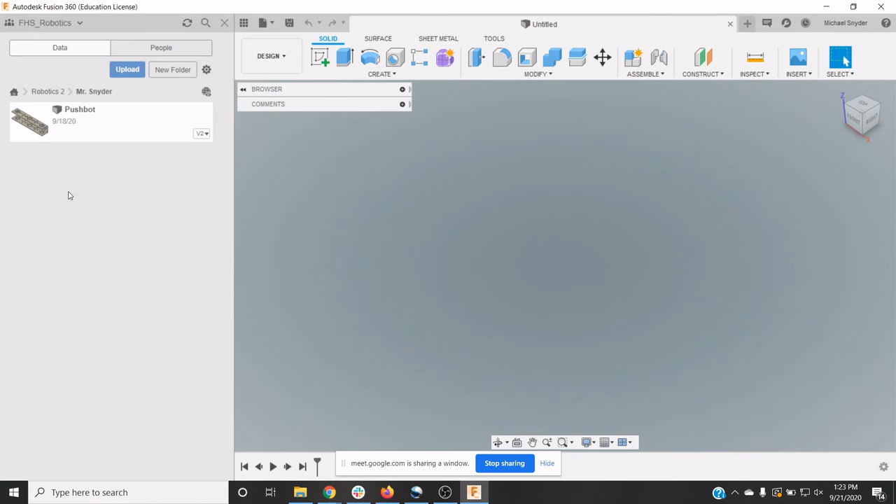We're going to open up the Pushbot project that we created inside the Robotics 2 folder. That's how we want to keep things organized.

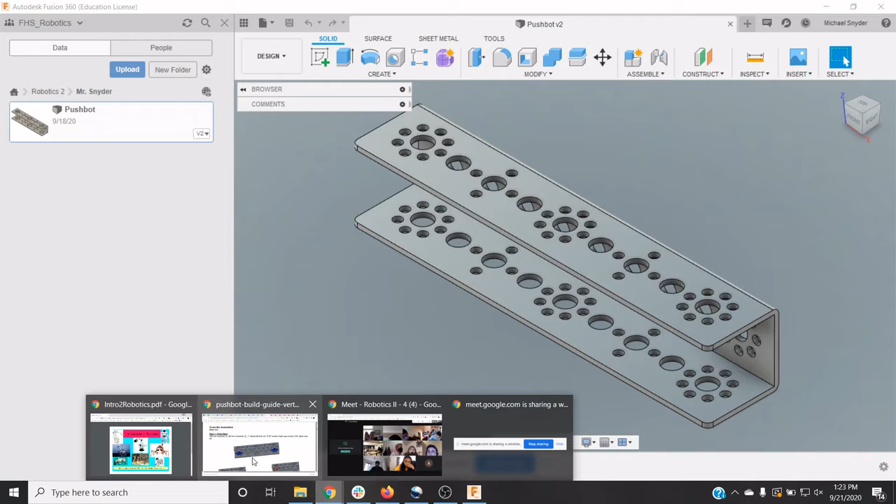So far, I have brought in a part from the Tetrix parts folder. Now that I've got my project open, I can go ahead and open up the Tetrix parts folder.

I want to look for different channels. Channel starts with a C up toward the top there. There are my channels, and it says I've got this one in use, the 160 millimeter channel. That is here, and I've placed it so that the open part of this C channel is toward the front.

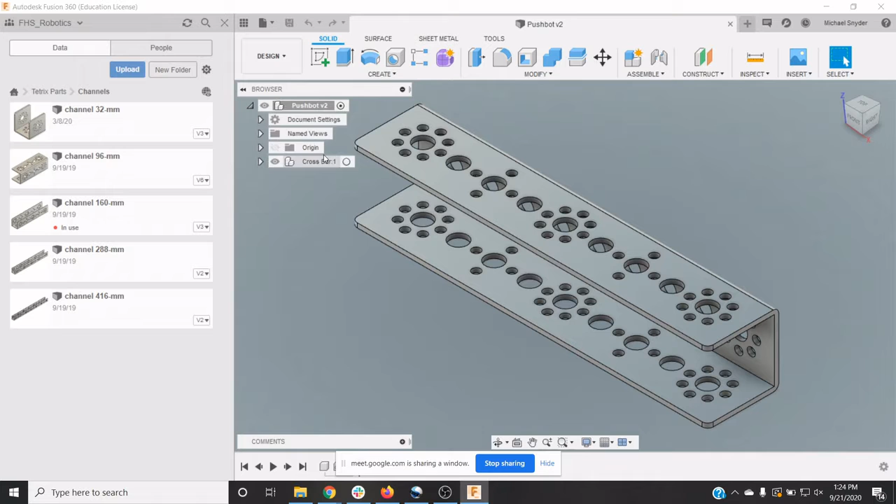I have also, under here, created a component called crossbar, and then I activated that component. I just reactivated it just now. So that little radio button there has a dot in the middle, which means that any parts I bring in here are going to be underneath this crossbar component.

Here we can see that I've got my channel, 160 millimeter. Now I have also grounded this part, which means that this part won't move. If I attach other pieces to this part, they will move to it. It will not move in space to go to them. How did I do that?

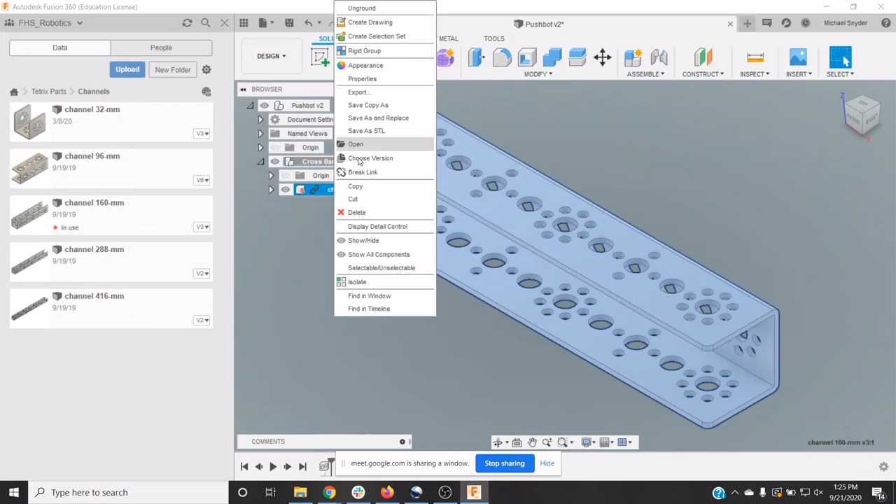Right click, and then at the very top, you can see that I can unground it because it is currently grounded. If yours is not grounded, it will say ground, and that's what you want to click. You can tell which parts are grounded because they'll have a little push pin next to them right here where my mouse is.

Okay, so it says we need two 96 millimeter channels, two 1-inch standoff posts, 10 5/16 inch socket head cap screws, and 8 keps nuts.

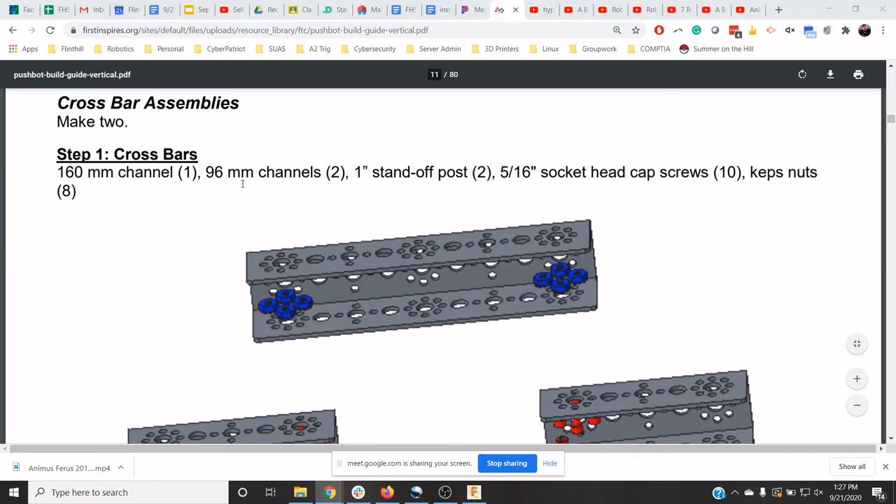We're going to start with the two 96 millimeter channels. Back in the Tetrix parts channels folder, here is the 96 millimeter channel. Right click on that and insert one into our current design.

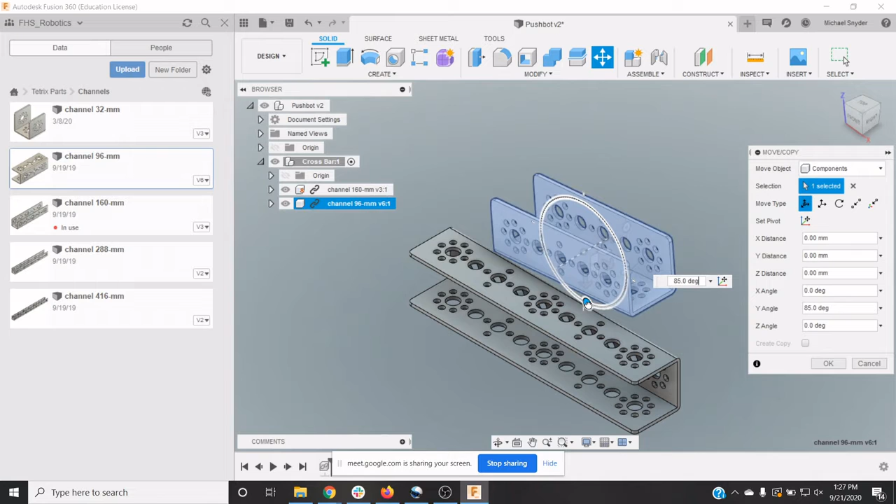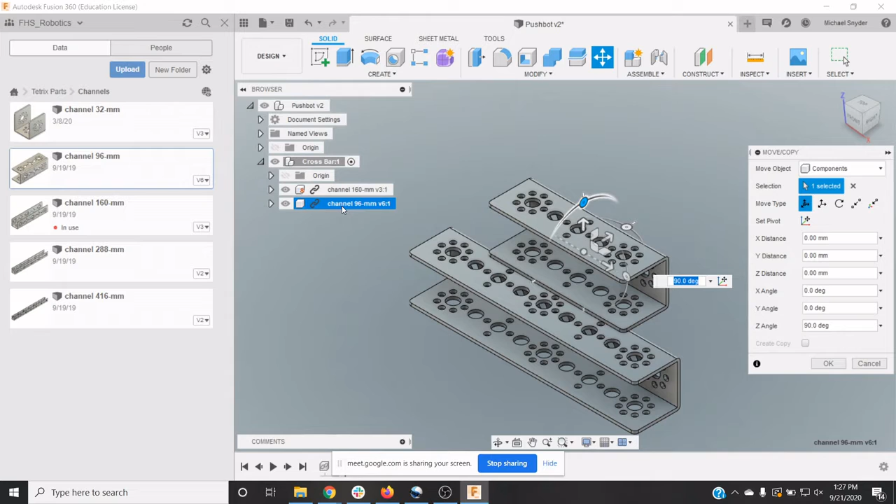I am going to orient this now so that it's in the proper orientation. Once it's been placed, I click OK. Also make sure that this part is underneath the crossbar assembly. I'm going to click OK and bring that in.

Now, this is pretty cool. We are going to assemble these two pieces together. Under the Assemble dropdown, I want to create a joint. So looking at the instructions, we want to put this piece on this piece.

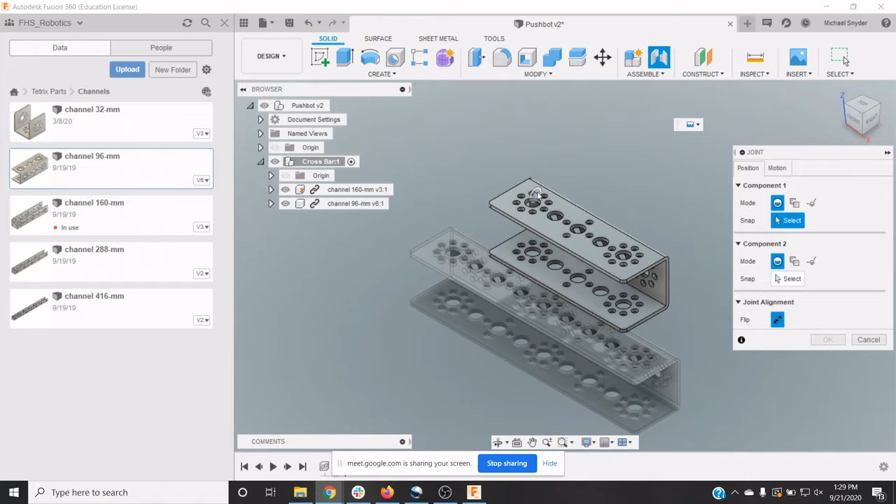Notice that I can select several of these different hole pieces. What I want to do is zoom in here and grab the outer edge of this center hole, the top part of it. You can also grab the bottom part, as I'm illustrating here, or the top part of it, like that. I want to grab the top part.

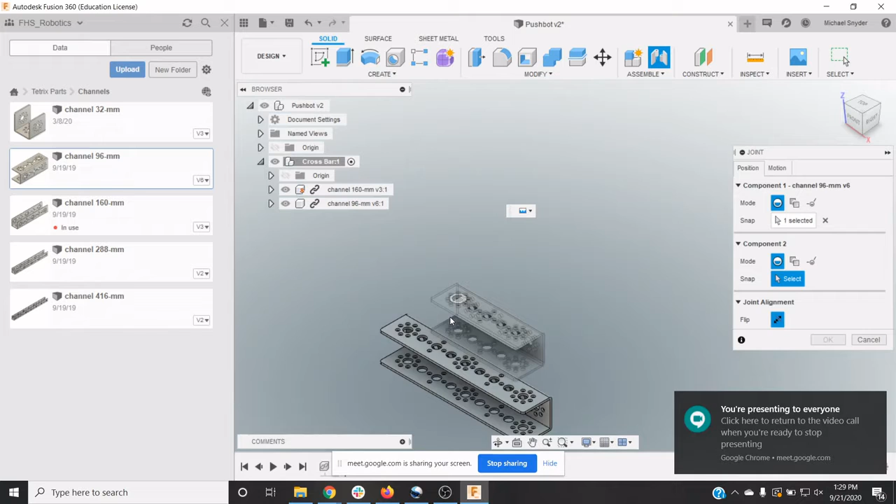Once I've done that, now it's saying, well, what do you want to attach this to? Well, now I want to attach it down here, to the bottom of this hole here. See how that's lit up? Click those two and it's going to move it into position.

Now I want to tell it what type of motion I want these two pieces to have together. It is the first one here, which is rigid, which means they cannot move - they are stuck together in this position. I'm happy with the way this looks. I'm going to click OK.

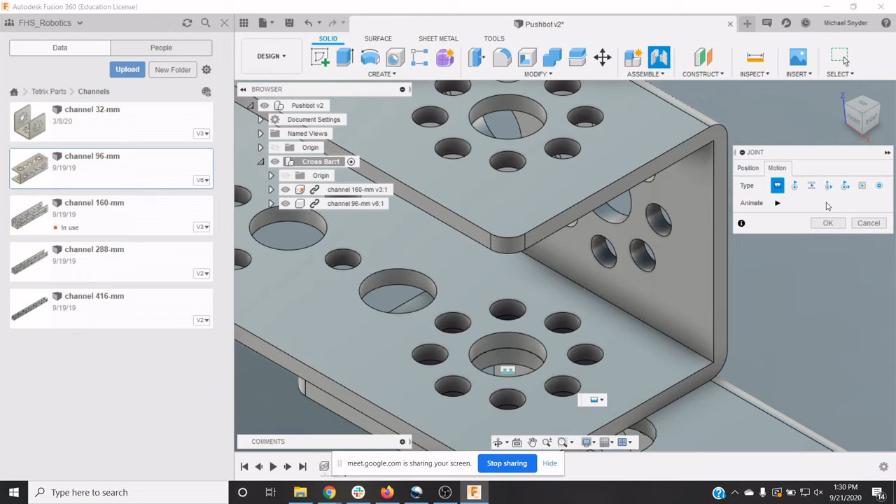Now, if you grabbed the inside of one hole and the inside of the other, you're going to have a part inside of a part. We don't want that, right? We want it to look like it would if we had bolted these two together in the real world. Let me spin this over so you can see.

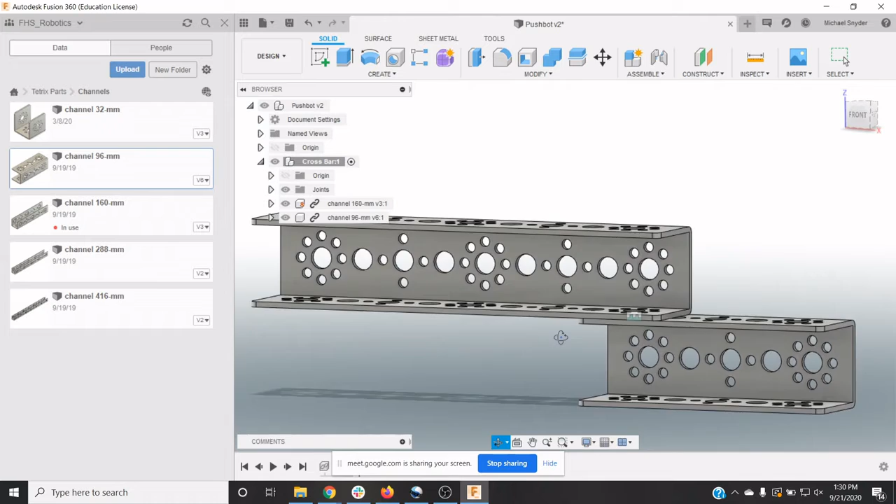Does anyone not have that? Good job, everyone. Got that all done.

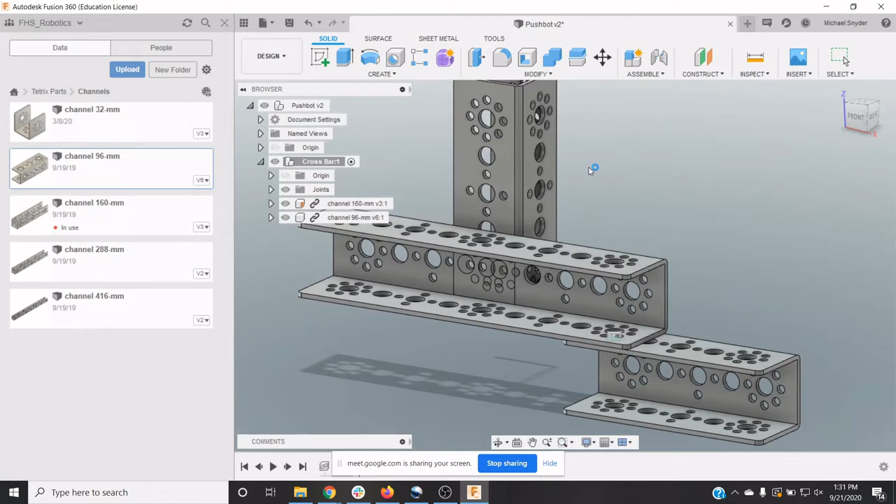Good, good, good. We need a second 96mm piece. Let's go ahead and insert that into our drawing. I'm going to rotate this one over into the correct orientation, just like I did the last one. And when it's in the correct position, hit OK.

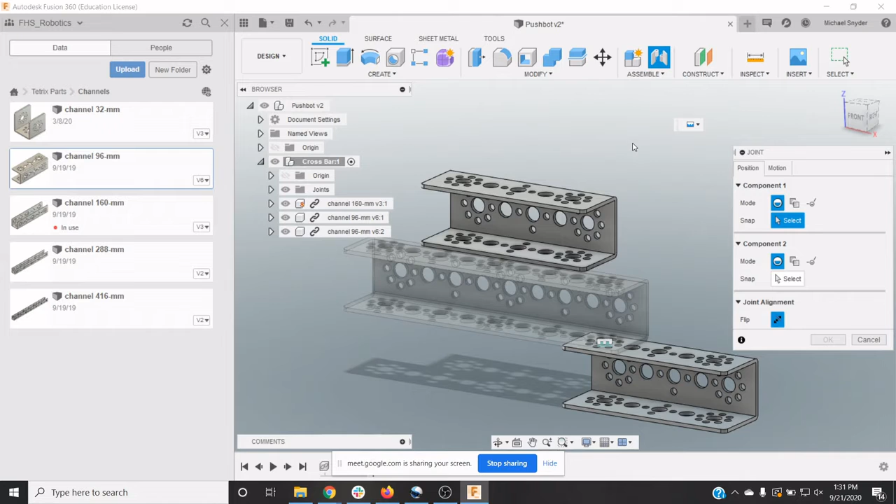Go ahead and assemble a new joint. I'm going to pick the top middle hole here, the rim of that, and then the bottom middle hole of this one. I can't quite... oh, it did pop up there just for a second.

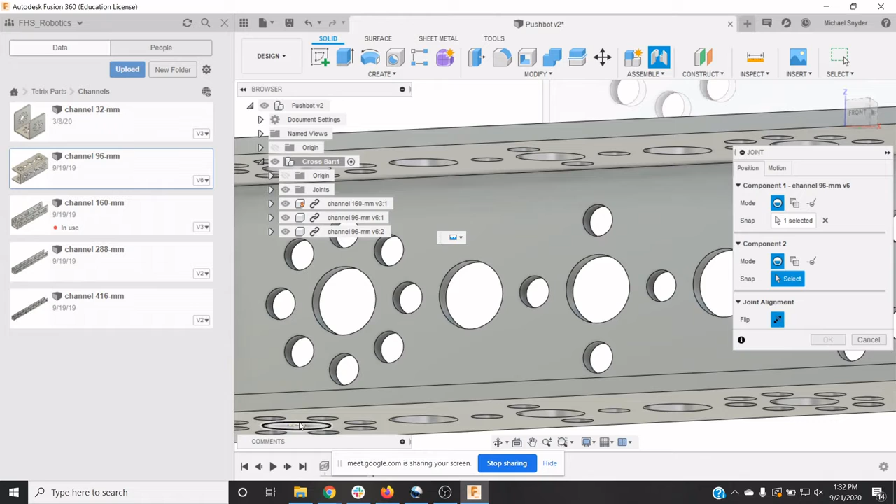Maybe I can use that. So if you can just orbit around until you can see that and select it. And there we go, zoom out. You can see those two pieces are now in the correct position.

Rigid is the default for me right now, which is what I want. Click OK. I'm going to go back to my home view. Yep, that looks right.

Do you have a question, Daniel? Sorry, we're having trouble with the speakers on this end. Okay.

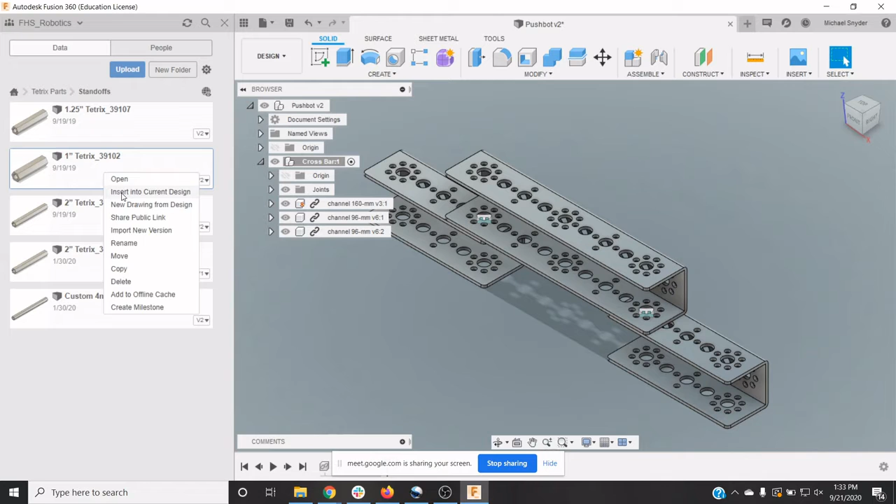Let's put in the 1-inch standoffs. It's under Tetrix parts. There's a folder for standoffs, and we're looking for the 1-inch. There it is labeled. Going to insert one into our current design.

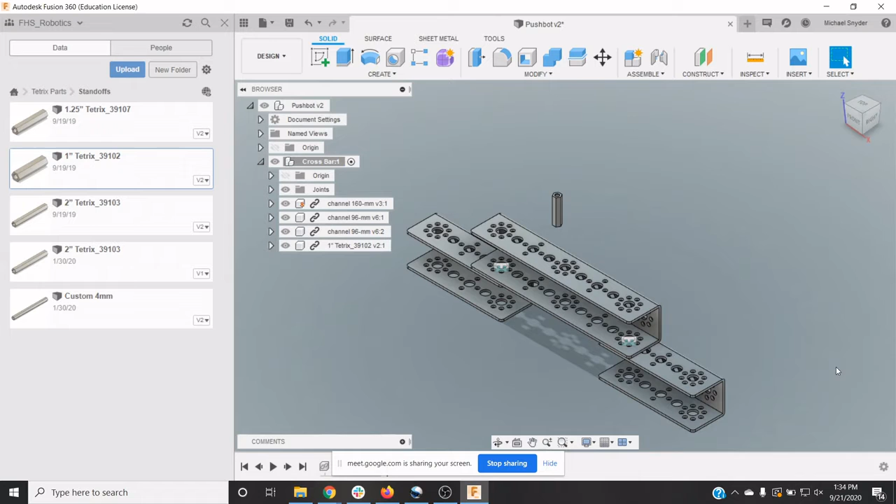Let's go back and look at the schematic. It's going to be in the inside first hole. That's what I'm going to look for. It's going to capture that position. I'm going to zoom in.

There's a lot of little holes in here. What we want is the outside, but not the hex - we want the round right there. I'll grab that, and then I'm going to orbit.

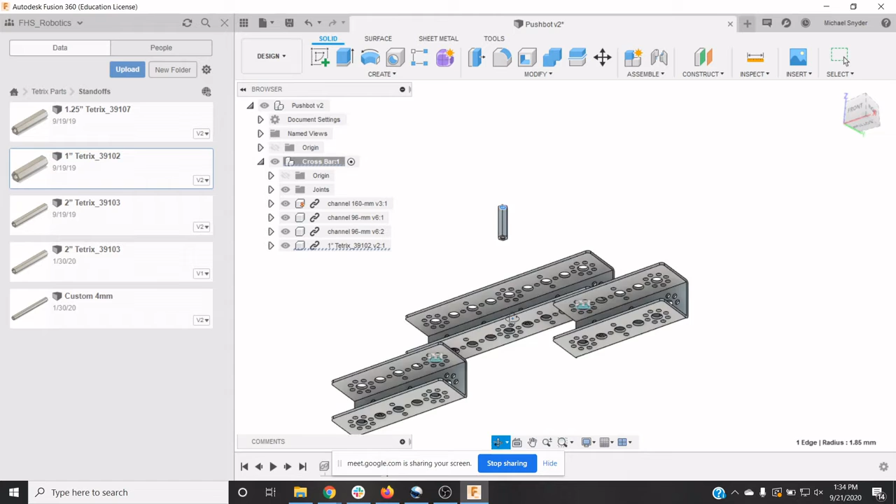Zooming in at the bottom here. And I want this hole right here. Zoom in so you can see that. Click those two. Oh, I wasn't assembling, sorry.

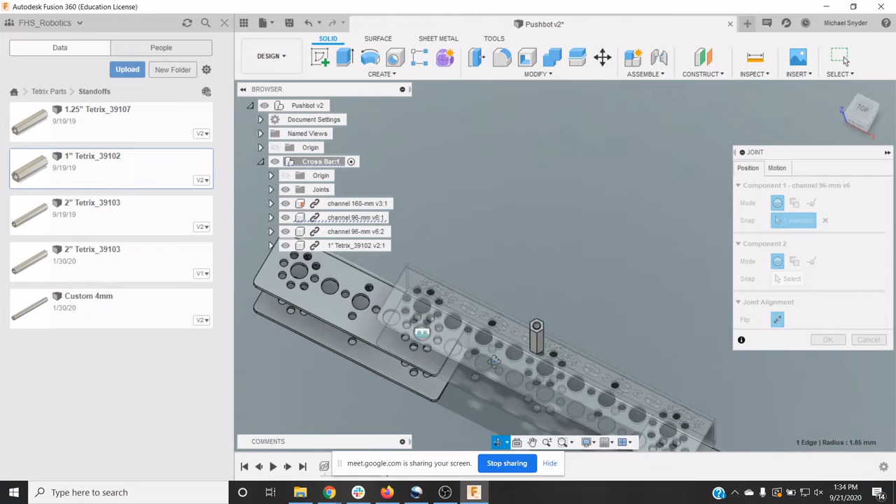I have a joint - a rigid joint. I want, again, this outer rim. And right there. There we go.

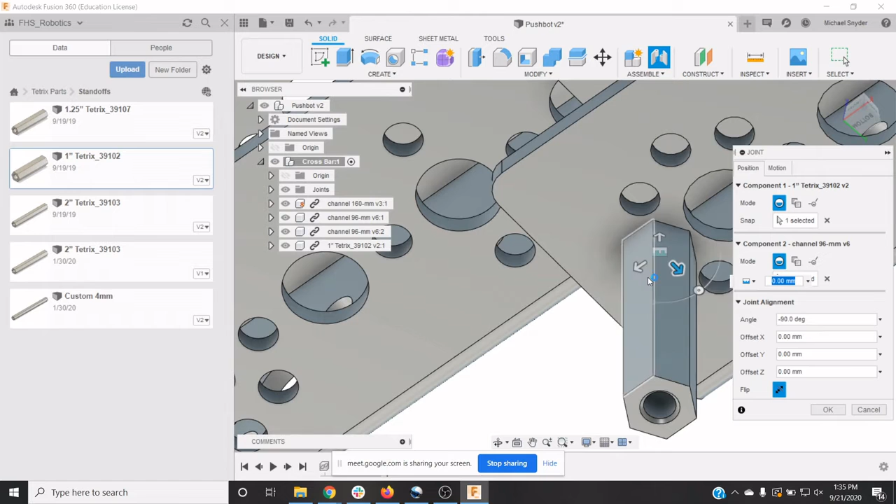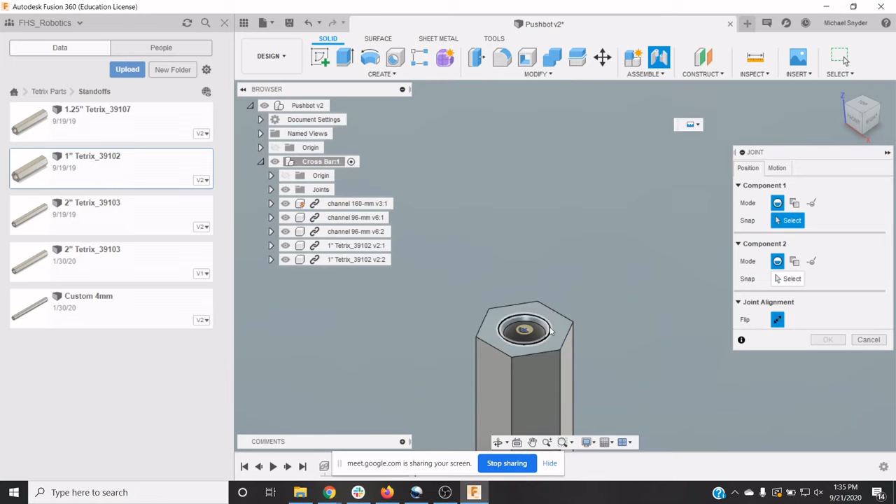And we need one more of those. Capture that position. Assemble joint. You could just hit J also to start this joint feature.

Excellent. We are ready to add the screws and nuts now. First we'll put all the screws in, and then the nuts.

Everyone still with me? Need me to pause for a moment? Just raise your hand if you need time to catch up. Yep, okay.

Andrew, if you could turn your camera on, please. Are you making a recording for this? I am, yes. Andrew, are you still there? Oh yeah, there's Andrew, sorry, I see Andrew. Oh, you've got two things going. Never mind, you're good.

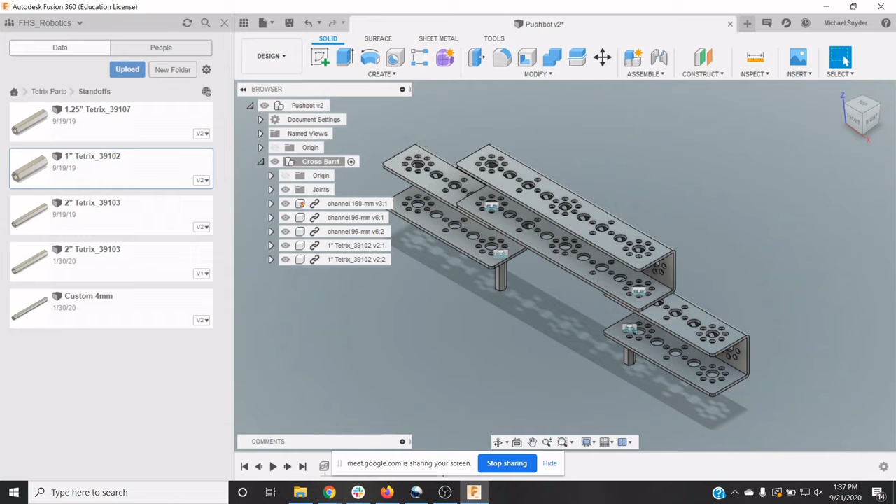All right, I'm going to go look at what the screw type is that we need. It says here we need the 5/16 inch socket head cap screws. Let's look for that. Screws and nuts. Looking for the 5/16.

So this is 0.5. 5/16 is less than half an inch, so it's going to be less than that. I'm thinking it's this one here because it's a socket head cap screw, a 0.3125. I probably labeled it like that because it's harder to do fractions in the title. That's the one we want. Insert.

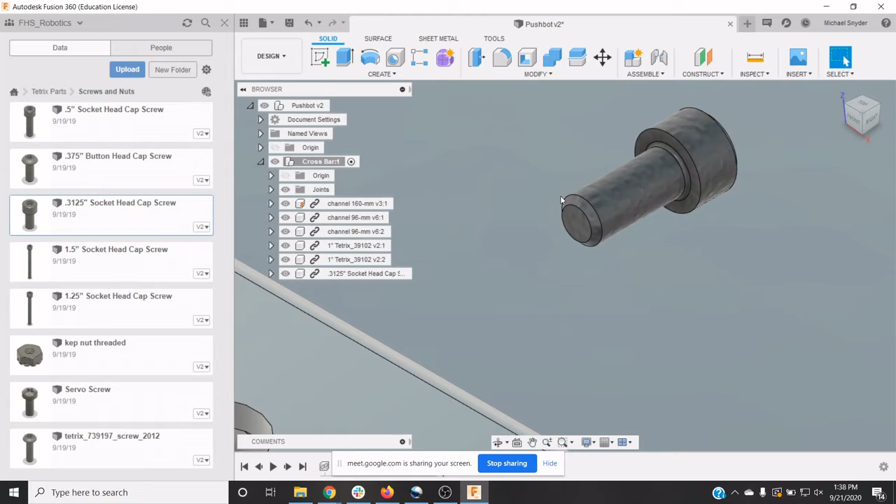Now when you're putting a peg like this into a hole, what you want to do is grab the center of this. Let me show you what I mean. Assemble another joint. It's going to be a rigid joint. So I want to grab this, the shaft part of this tube.

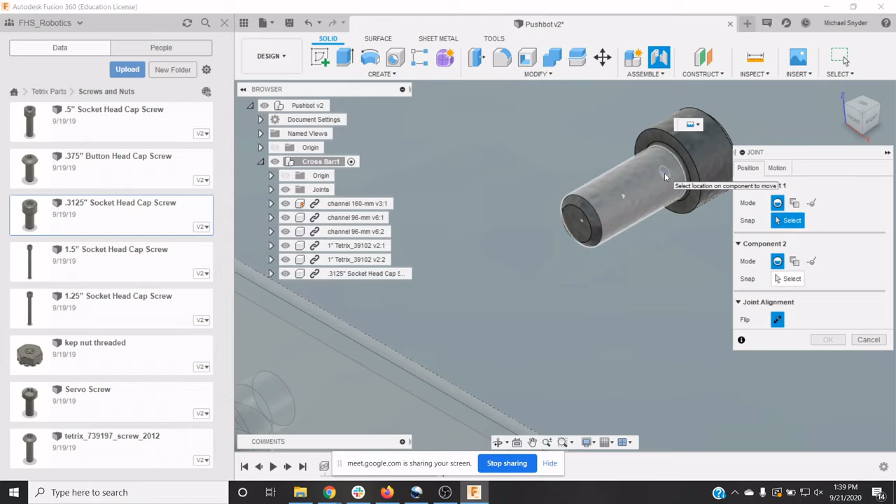And you can see here I've got 3 points. Here it's the center point and the top cap point. This is the one I want because I want this flush with the Tetrix channel. I'm going to grab that one right there.

And then let's put this one in right here. So this will be like we're screwing that standoff in together. So I'm going to grab this. Let's try that.

Okay, so put it in there. It's in the right spot, it's just not oriented in the correct position. It's upside down. So what can I do? Well, I should be able to flip that over. I can spin it around. That doesn't help me.

Ah, here we go. Angle 95 degrees. There we go. Okay, so there's flip right here, which is going to flip it over. So now it's in the correct position, and it's a rigid joint by default. I'm going to click OK. And we've placed our first screw.

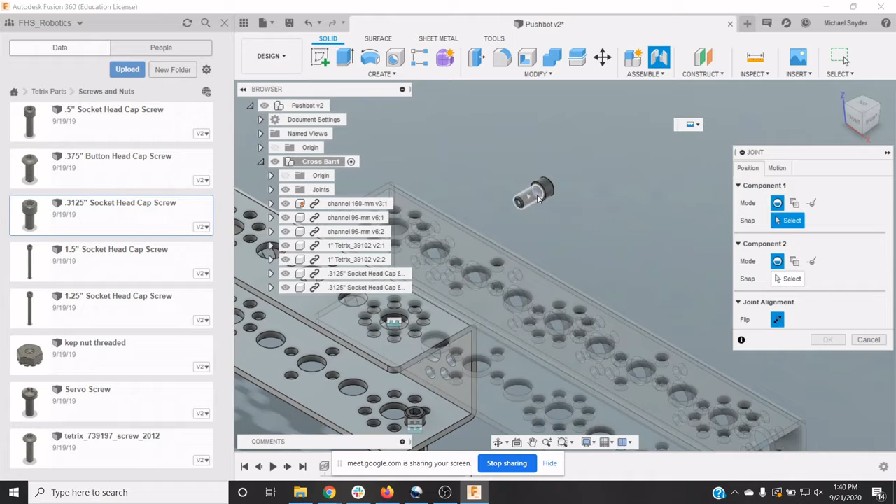Let's go ahead and do that for the other side. Capture that position, I'm going to press J for joint. Grab the uppermost part of that shaft, and this hole right here. Upside down again, hit flip, and okay. It's a lot faster than actually putting a screw in there. As you get better and better at this, this will be much faster than actually bolting Tetrix parts together. So you can create a robot much faster in this virtual world than you can in the physical world.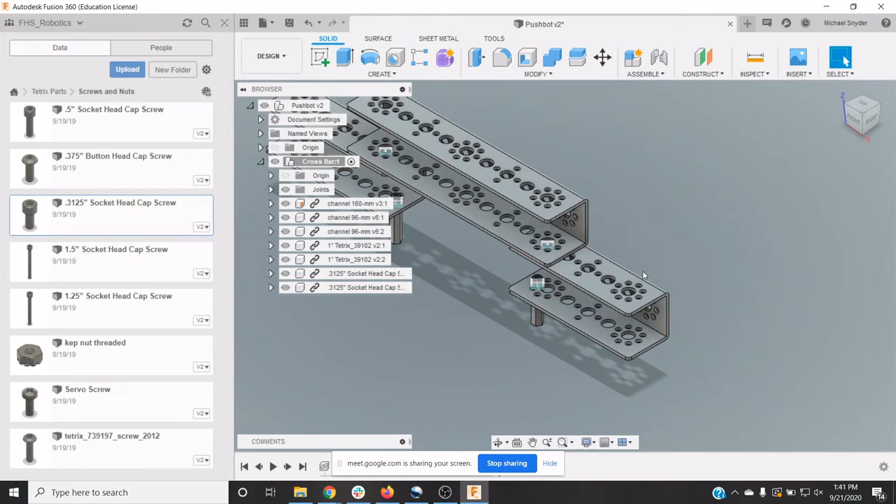I need 8 more of these, and they are going to be put into, you can see where they're going to go, from the inside of the channel up. 4 over here, 4 over here.

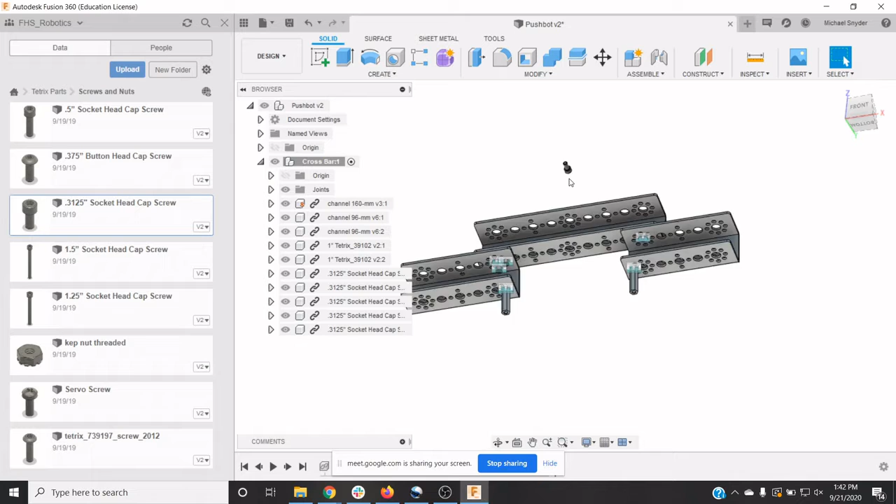I'm going to go through this a little more quickly because this is just a rinse and repeat kind of activity.

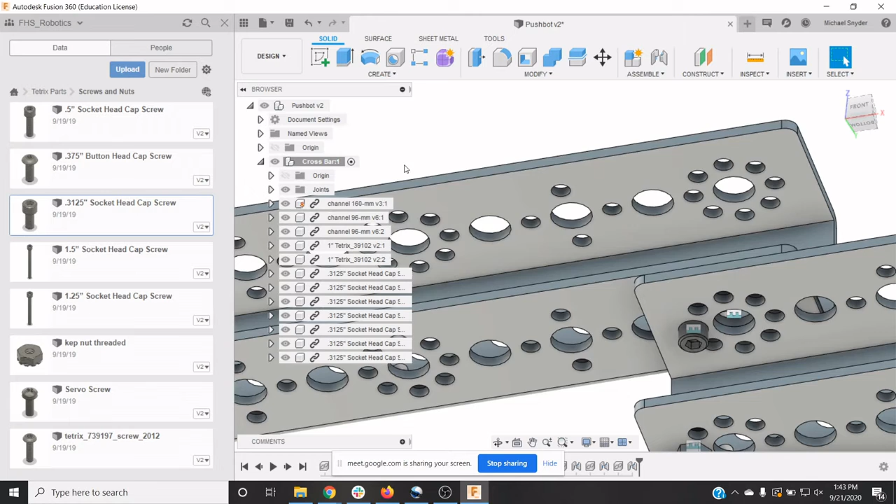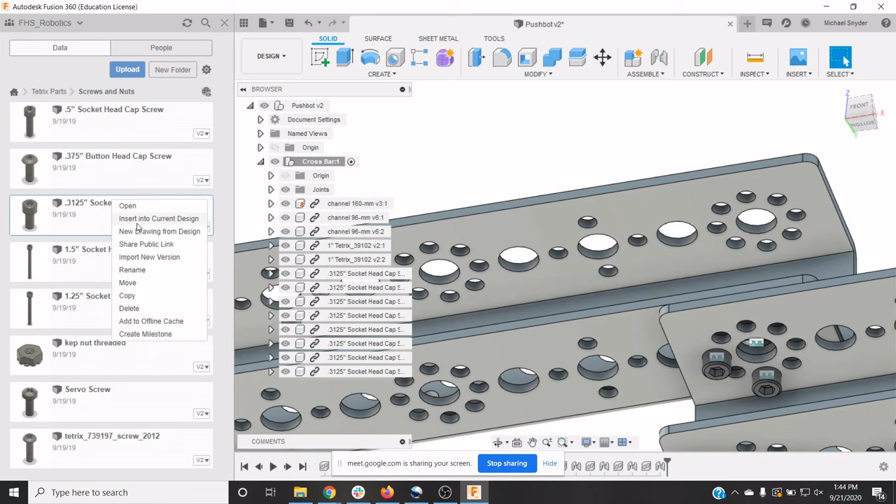This is a lot of detail work, right? You gotta make sure that you are being very detail oriented. A lot of this may seem hard now, but with practice it will get easier. Using the keyboard and the hotkeys can help save you a lot of time as well.

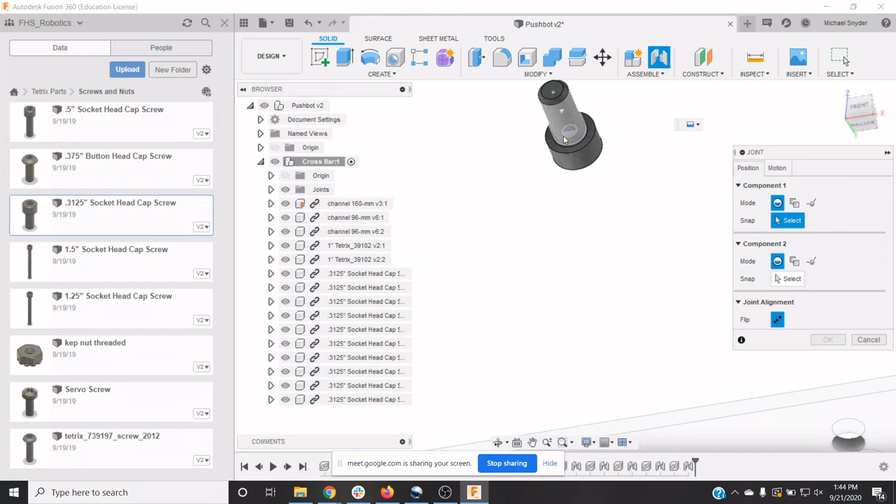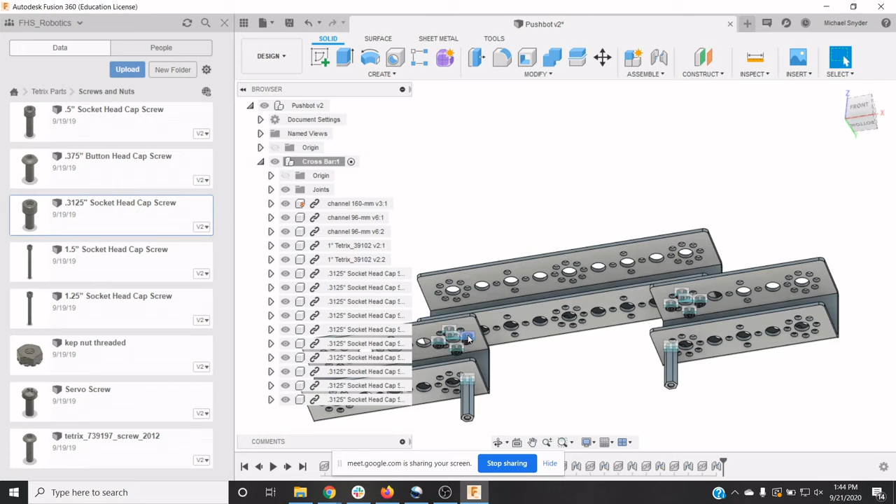Alright, so all of those socket head cap screws are in place now. Wherever you are, as long as you have at least one screw that we can put a nut onto, I'll let you finish up yours for homework.

We need 8 of these, kep nut threaded. Insert that into our current design. There it is.

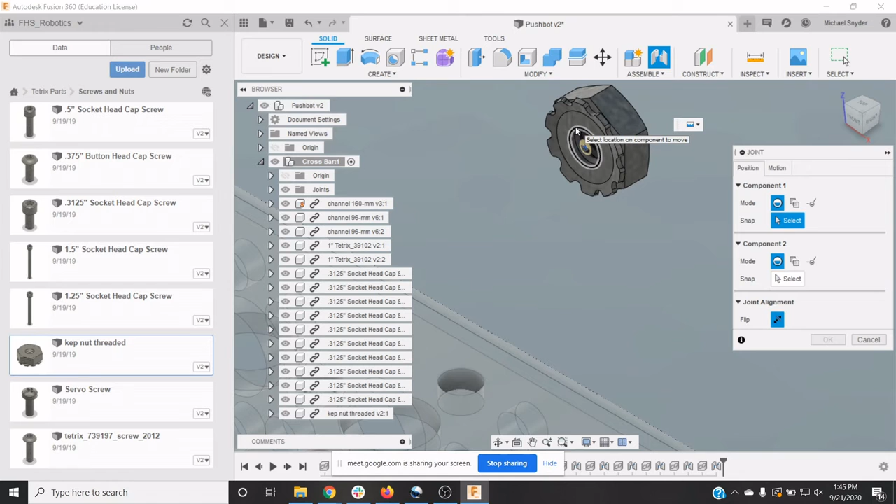As I grab this, I want to grab the inside, so I'm looking at the bottom, inside rim of that threaded hole. And I want that to match up with, on the Tetrix piece, the rim of the hole here that goes around where the socket head cap screw protrudes.

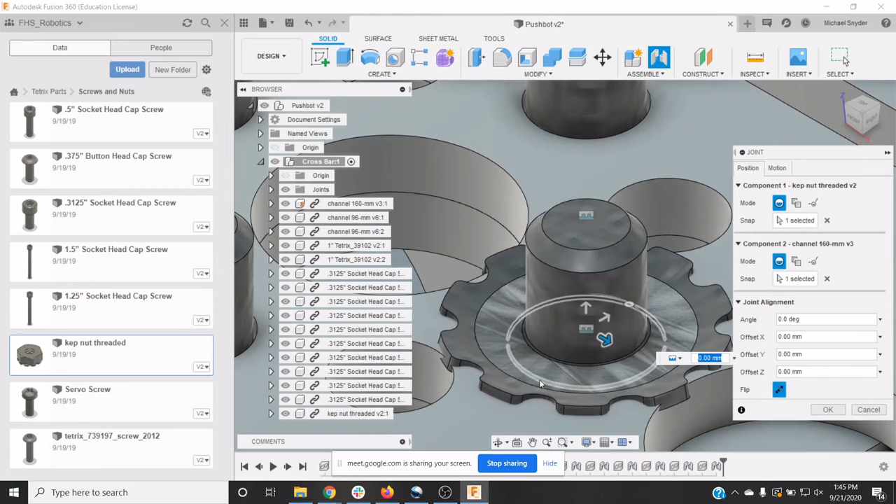Through. Okay, that went in upside down. I'm going to hit flip, flip it over, and there we go. I'm going to repeat this 7 more times.

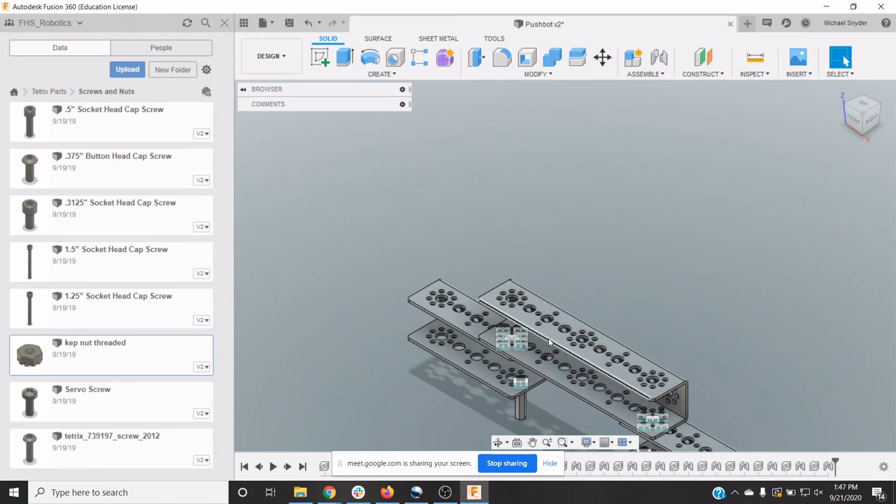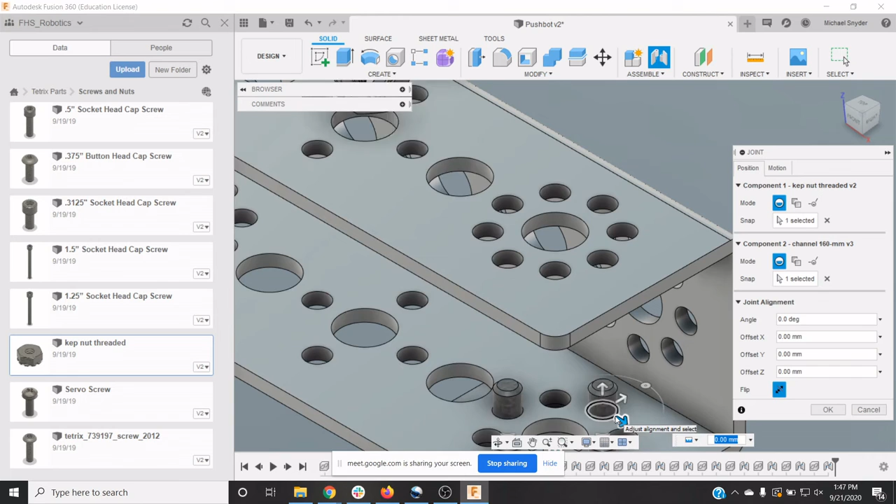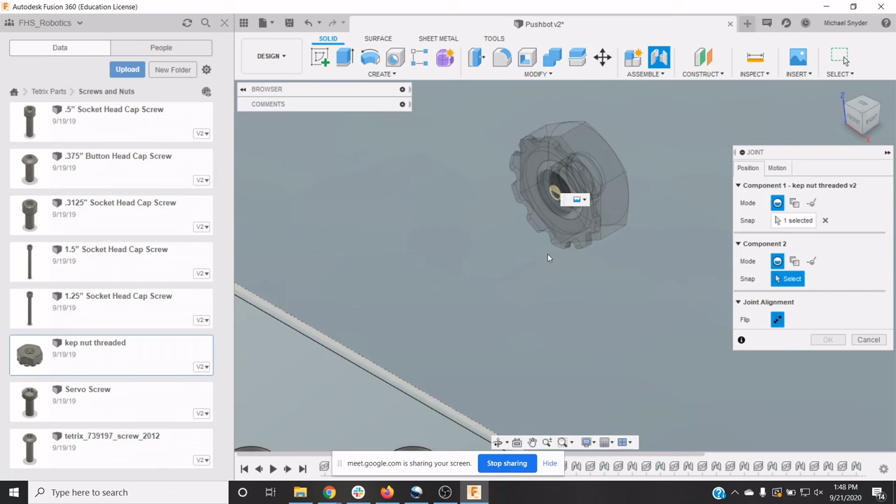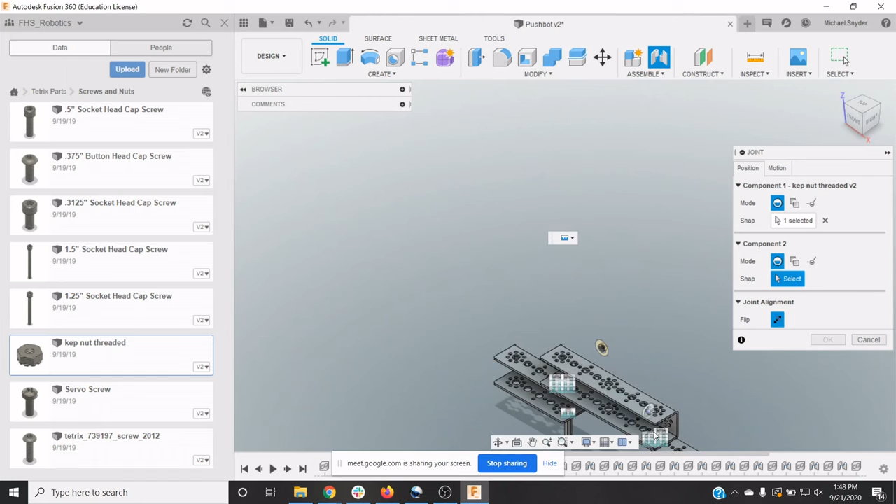The first side all done. Got 4 more to go. And there are the other 4.

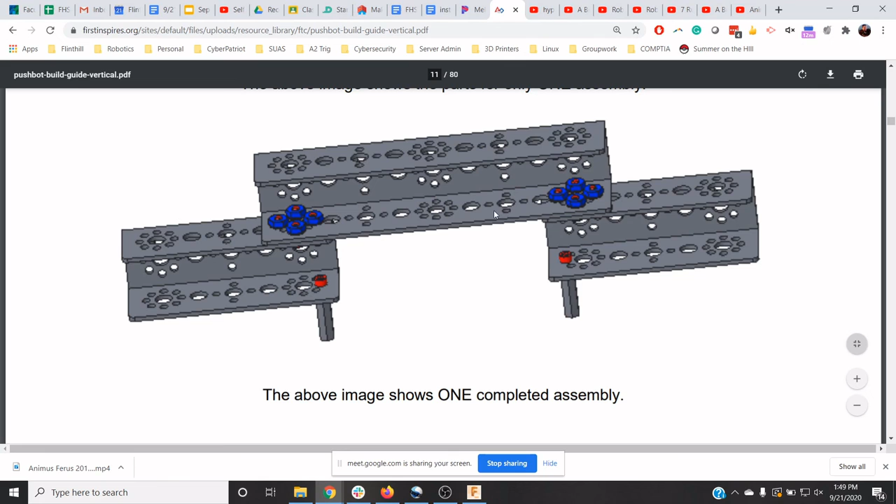Let me check my instruction manual. This is what it should look like, and that's what we've done. The above image shows 1 completed assembly.

So I think we need 2 of these. Yep, make 2, make 2. Well, if I made 1, do I have to go through all those steps again?

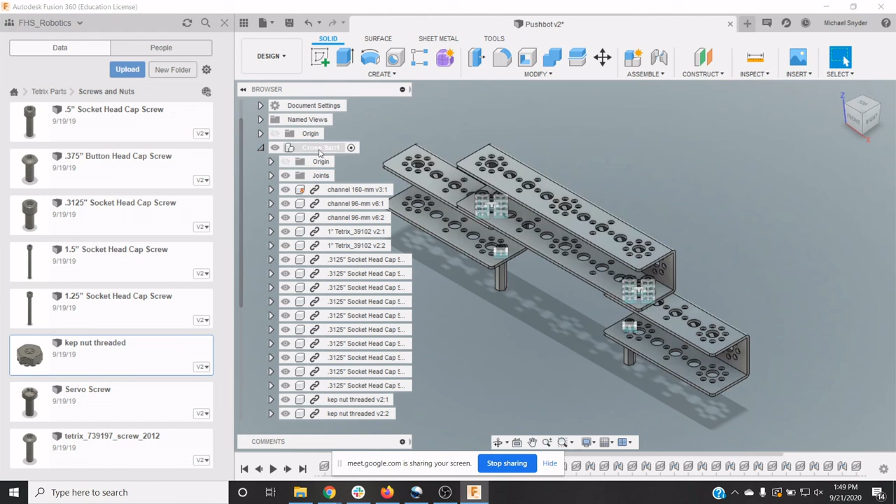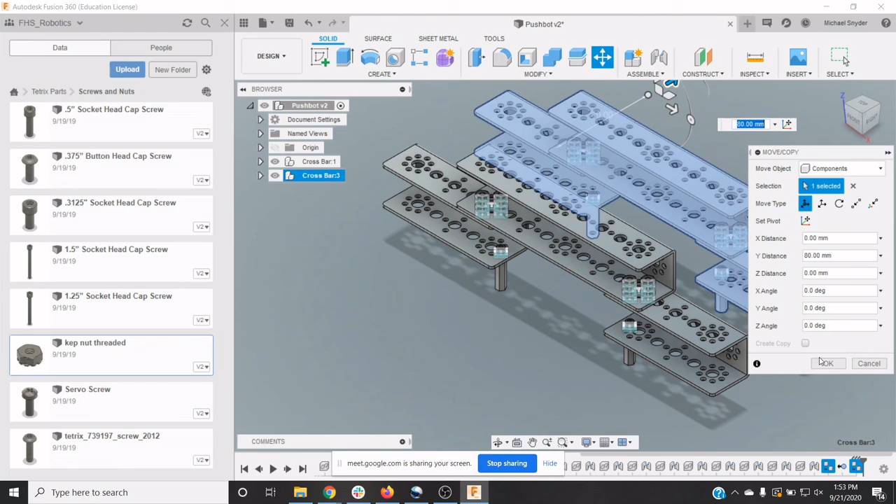Because we've organized things nicely, the answer to that is no. We have organized everything into one component called crossbar. What I wasn't doing is making our selection back up here to the Pushbot. So making Pushbot active, I can then go down to crossbar, say copy, click anywhere in the build area, click paste, and now I've got my second one. I can bring it out and I can see it. Click OK, and now I've got 2 of those.

Only make that copy when the first one is complete. If you make a copy before the first one's complete, you're going to have to add the screws or nuts or whatever pieces you missed on the first one to the second one as well. So make sure the first one is done, and then make your copy. The key there is to make sure that the Pushbot is the active component.